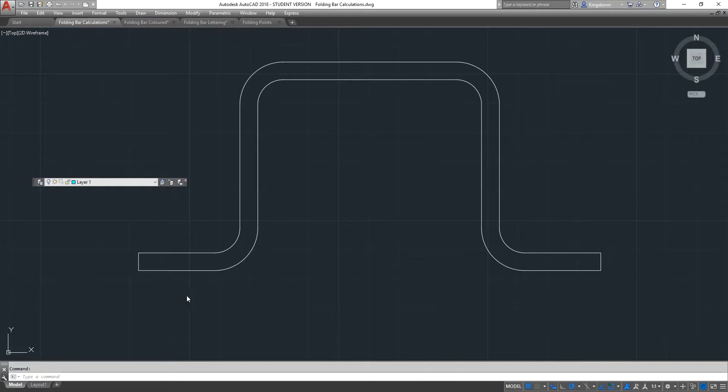So what we want to do is work out the exact cut length right around this bracket, calculate it out, and then work out what our fold points are. It's going to be folded in a press brake with a dogleg blade, though it could be done with a straight blade. So we'll turn some information on here.

Got some dimensions here. You can see from the overall top line right down to the bottom line, it's 71mm high overall. Let's turn those off. Internally, clearly it's 75mm.

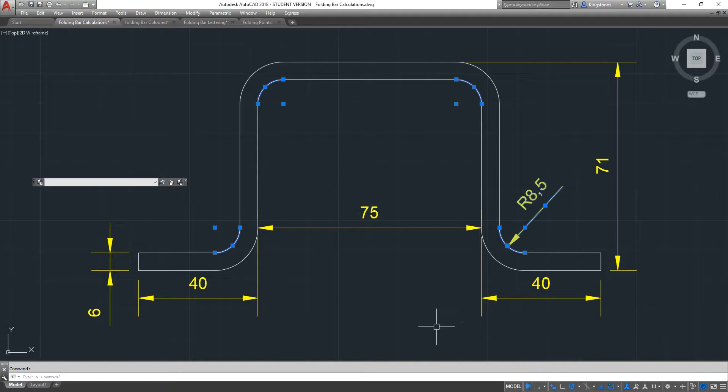From the very end to the inside, we've got a length on both sides of 40mm, so it's uniform. And you will see that in the corner it's got an internal radius of 8.5mm, which is the same for all of these corners here. Exactly the same. So there's the 6mm on the end for the thickness.

So we'll just bring it out a bit. So I've written up the top here, calculating the cut size and the folding positions on a flat bar.

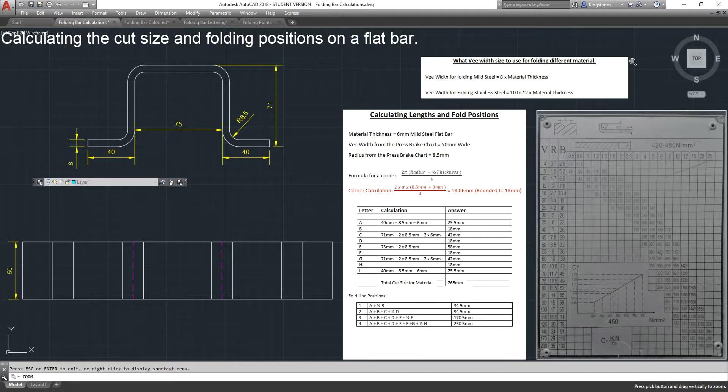So the very first thing we need to know is what V-width size to use for folding the different material. Well, it's going to be mild steel, so the V-width or the opening on top of the V-block for mild steel is always 8 times the material thickness. I'm using 6mm mild steel, so 8 times 6 is 48mm.

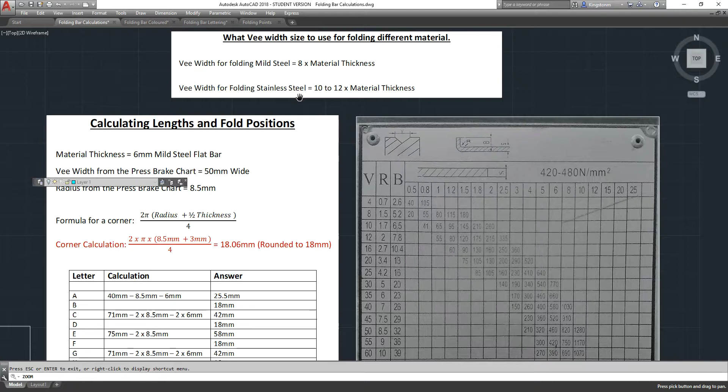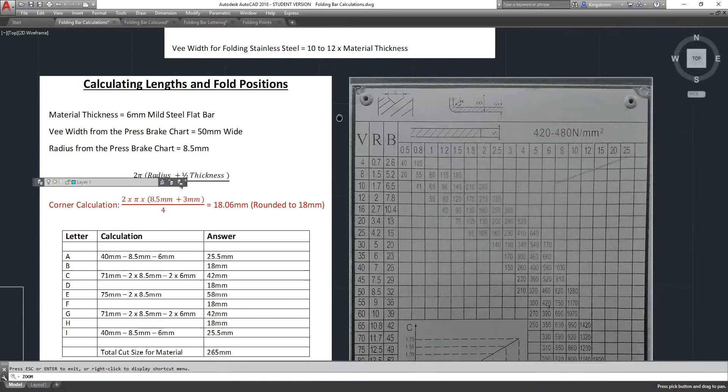Just for comparison, if it was stainless steel, the V width for folding stainless steel is 10 to 12 times the material thickness because of the higher tensile strength. So we want a V that is very close to

48mm. So we've got a press brake. Here's a chart on a press brake. Going across the chart, this line across here, here's 6mm. We could come down this line here.

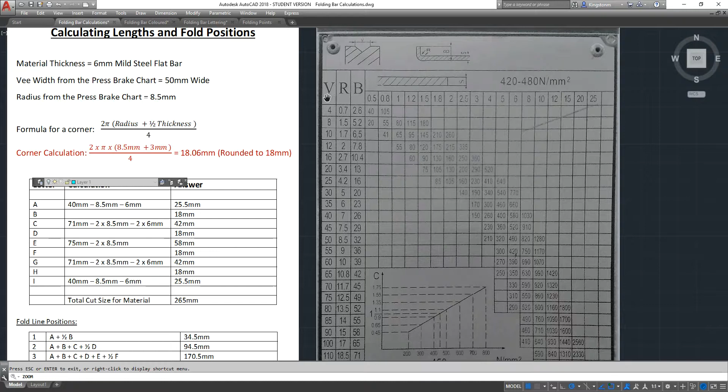The V on this side here, V for V, there's the opening on the top of the V. So that width for us needs to be 48mm. So coming down the chart, we've got a 40, we've got a 45, and we've got a 50. We're going to be using the 50mm V.

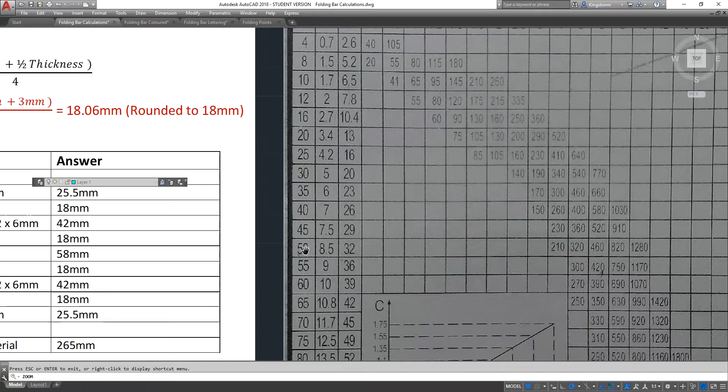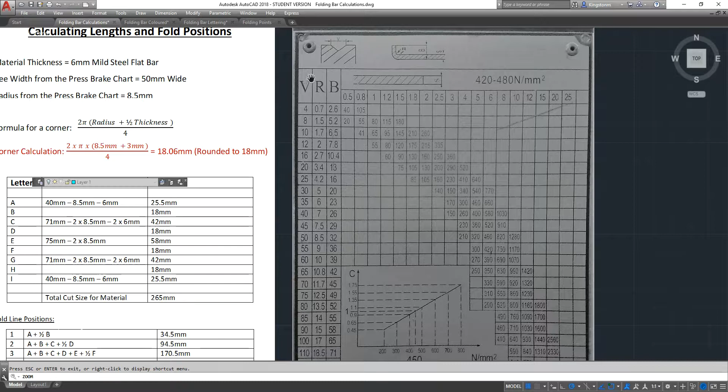And that tells us that our radius is the 8.5. So just this little drawing here, here's the 8.5 right into the internal corner of the fold. So that's the information we needed. Radius of 8.5 with a 50mm V. And that's why I have drawn it with an 8.5mm radius in that corner.

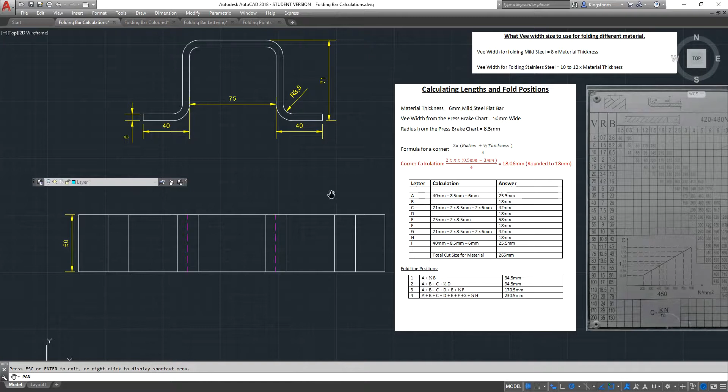So what we're going to do is we want to calculate this bracket out. So I've drawn up a chart here, calculating lengths and the fold positions. Material thickness is 6mm, V width, as I said, is 50mm, internal radius of 8.5.

So what we need to do is work out how to make a bracket like this, given this information. So one of the things you can do is take your bracket and break it down into its constituent components. It has a straight, then a bend, another straight, a bend, a straight, bend, straight, bend, straight. You can see I've individually labelled them. So that's how we're going to break it down.

What have we got on this drawing? Okay, here's all our information. So how do we break the first fold down to get this length A, which was that first coloured portion there? So it's 40mm overall from that outside line to the inside line.

That means 40mm would have to take off the material thickness, that's 6mm, and then we'd have to take off the radius. So we're taking off that line distance there, because the straight portion only goes from this blue line on the end here to this line here. That is the straight component right there. So it's 40 minus 6 millimeters minus 8.5 millimeters. So that's how we're going to work out our two straights on either side.

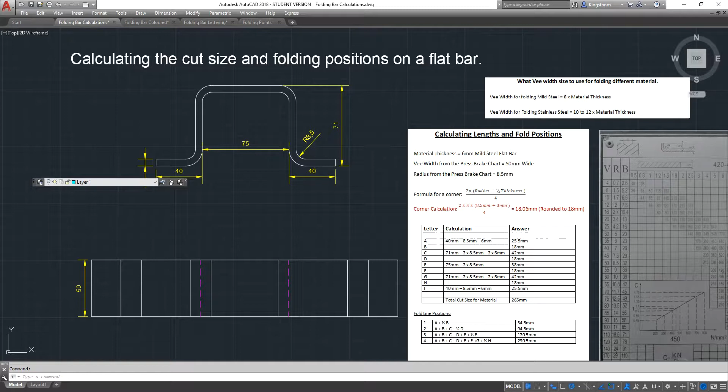So let's go back to our chart on our front sheet. We're going to get the right scale on this. Okay, so what I've done here, I've got my letter codes, A, B, C, D, E, F, G, H, I, down the left-hand side. I'll just drop in the pen so you can see the hand. A, B, C, D, E, F, G, H, I.

So the very first one, A, I said that was 40 millimeters. Let's go back into it. It's 40 millimeters long from there to there. And we had to take off the material thickness of 6 mils and the radius of 8.5. Drop back out of that, and that's what I've got. I've got 40 millimeters minus 8.5 minus 6 millimeters leaves 25.5.

So the A and the I, the two end pieces, if you come down the chart, you'll see that I is exactly the same, 25.5 millimeters, same as A.

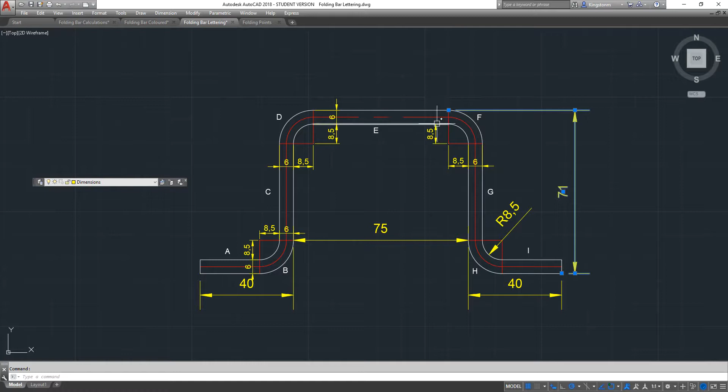C and G, they were the two lime green ones, and they were what I said, 71 minus 6 millimeters minus 8.5 minus 6 millimeters minus 8.5. So go back onto the front page. C, you can see what I've done. I've got 71 minus 2 times the radius minus 2 times the material thickness, leaves 42 millimeters.

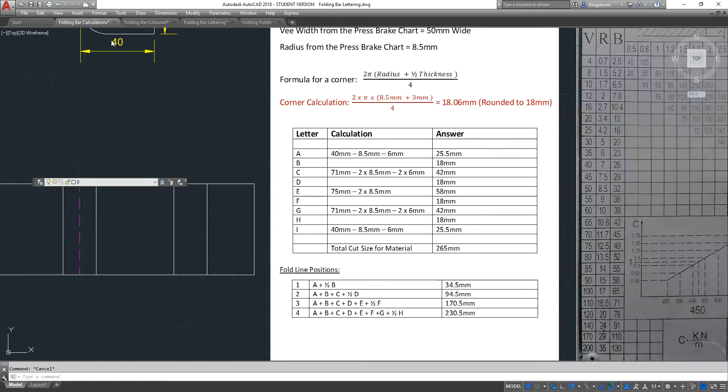So we've got C and G, which are at 42 millimeters. The only last straight line length is E, and that was 75 internal minus a radius and minus a radius. Go back to the front page. E, I've got 75 minus 2 times the radius, leaves us with 58 millimeters. So there's our straight line lengths, A, C, E, G, and I.

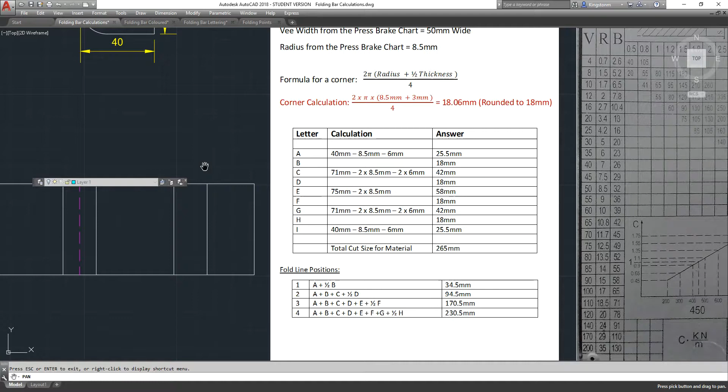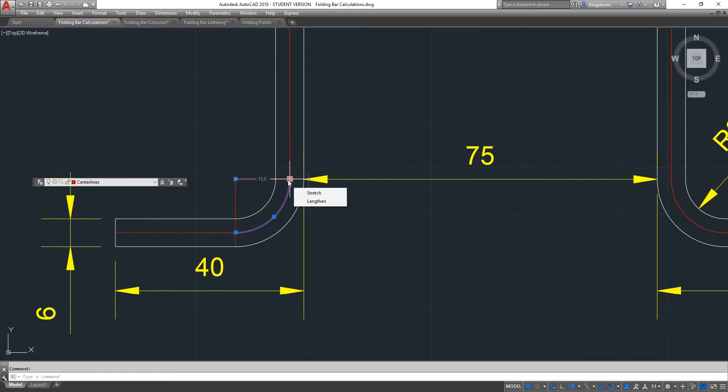The next thing we have to do is work out our corner radius, or our length, for the corner. Now I've got some more stuff to turn on here if I get my act together. When we work out our length around the corner, we're working out this mean line, not the throat line or the heel line, but this line here. So it's 8.5 millimeters plus half the material thickness, being 3, is 11.5 millimeters that you can see on the screen there.

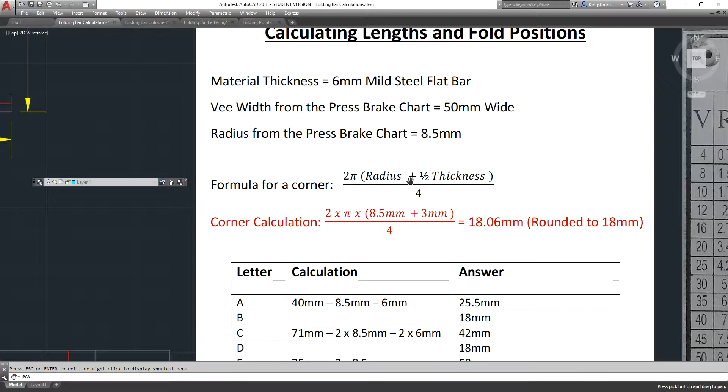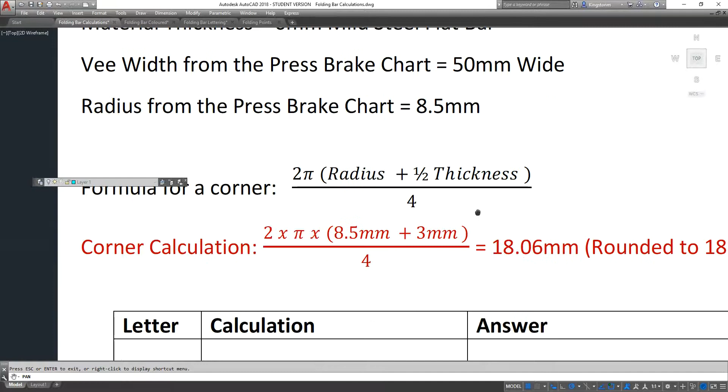So into the formula. The formula for a corner is 2 times pi times bracket radius, 8.5 millimeters plus half the thickness, i.e. 3 millimeters, all times together and divided by 4. Dividing by 4 means that 2 times pi times radius plus half thickness is for a 360-degree circle. Well, clearly a corner over here is 1/4 of a circle. So a circle being 360 divided by 4 is giving you a 90-degree corner. So on this calculation here, if we start to put our information in, corner, we've got 2 times pi times 8.5 plus 3.

Let's do that on the screen for you. So we've got 2 times, we got pi on here. I didn't even look for pi. So good at making a fool of myself. There's pi times bracket 8.5 plus half the material thickness, so 0.5 times 6 millimeters, close bracket, equals. So that's telling us that it's 72.25 millimeters for a 360-degree circle on that mean line.

So we have to divide it by 4 and we get 18.06 millimeters. That's what I've got there, 18.06. I've rounded it to 18 millimeters. You're not going to be working to 0.06. That's going to be an absolute impossibility when you're marking the piece of steel out with a scribe and a square. I could have rounded it to 18.1, but you're not even going to be able to work to that.

If you come down here, we've got 25.5. I mean, you can get pretty close to 25.5, so that's acceptable.

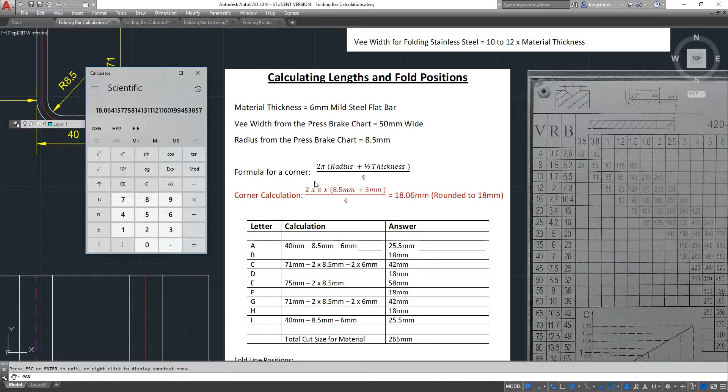So I've rounded this to 18. Let's just get rid of our calculator for a minute.

If you look at our corners, let's go back up into the coloured chart. B, D, F and H. Clearly 4 corners at 90 degrees actually add up to 360 degrees, so they make up one circle, but individually on the chart, B is 18, D is 18, F is 18, H is 18.

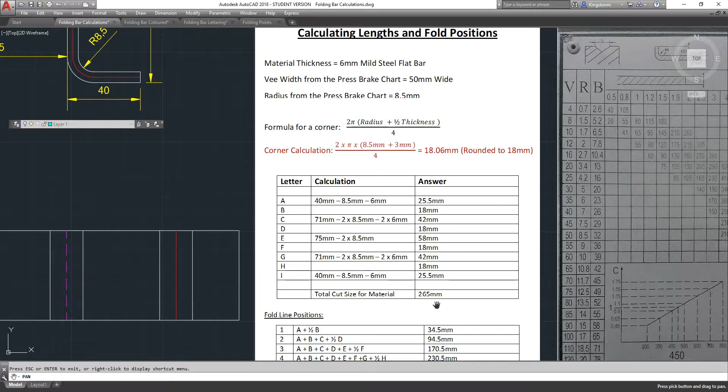If you add all those dimensions together, I'm not going to do it on the calculator, but you're going to get 265 millimeters. So that's the cut length of the bar that you're going to start with, using an 8.5 millimeter radius with a 50 millimeter V. So I've got this piece of steel here.

Well, it's a drawing, of course, but it's effectively a piece of steel. If I click on that and hit properties, you can see that it's sitting here at 265 millimeters long. There's the length, 265. So I've marked it out.

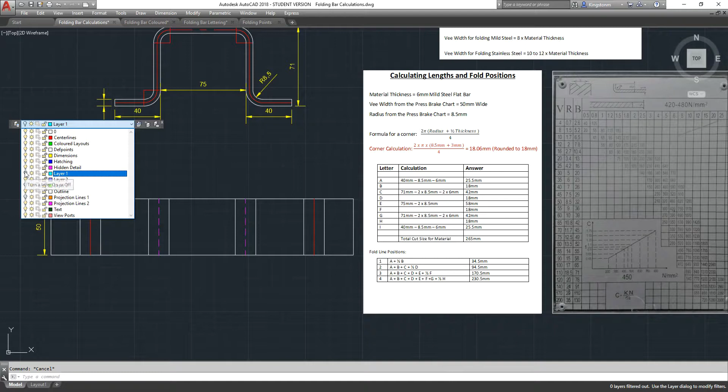So what I'm going to do is turn on some dimensions. Which ones have I got them on? I think they're on layer. So down here, our first dimension, can I get that on the screen all at once? I can, possibly. No, I can't. Yes, I can. You've got good eyes, you know you have.

Your first dimension, this length here is A, it's 25 millimeters. The next one is your B, it's 18 millimeters. So I've laid them out. This is A in this box here. Go into pan. This box is A, this split box here is B, this one is C, this is D, E, F, G, H, and I. You add all those dimensions, they're exactly the same as what's in the chart there.

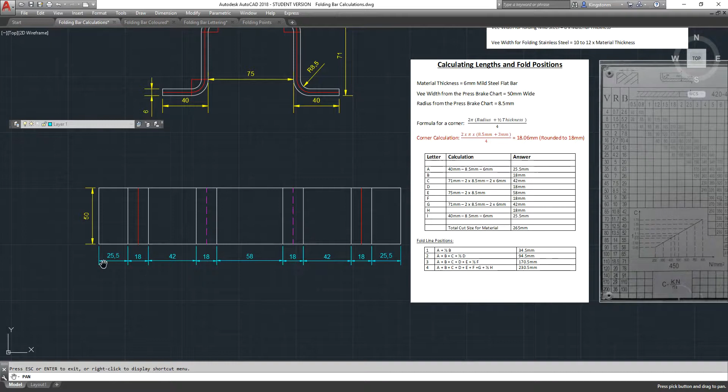So that's how you work out a cut length for a piece of bar.

So you've marked your lines on the bar, now you've got to do your folding, and you've got to work out where your fold positions are.

The computer's frozen for a moment. Now we're away again. Go back to the start.

So these lines I've got here, the two red ones and the two - come on, it's just freezing a wee bit - the other two lines are exactly in the position of half of that 18mm line there on each one.

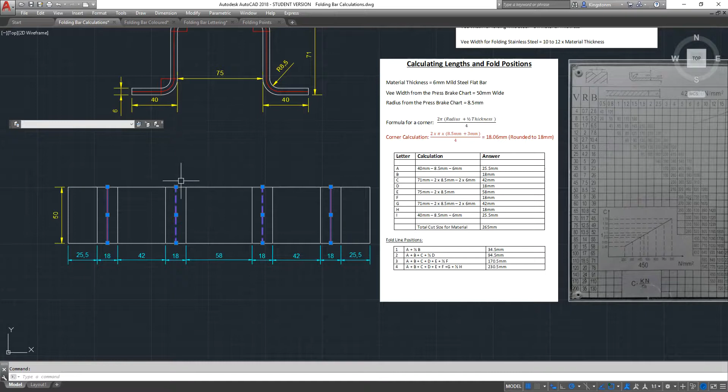So in the chart, I put the fold positions for you for this particular bracket. So number one, I'm going to get that on the screen. I've moved it when I shouldn't have. So number one is the length A and half of B.

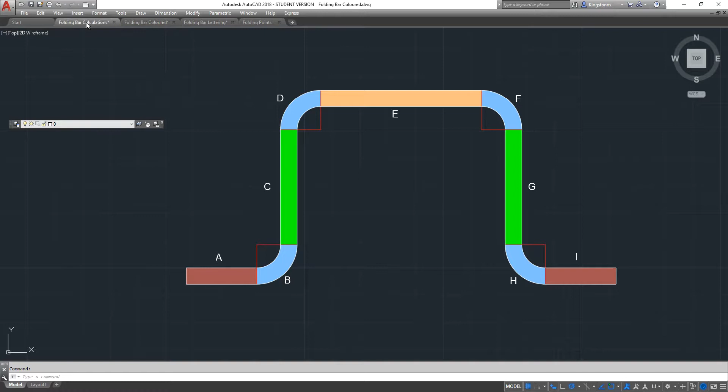So let's go back to the coloured one. The length of A was 25.5. The length of B around the corner is 18mm. So half of 18mm is 9mm and 25.5. So you can see here I've got A plus half B: 9mm and 25.5mm is 34.5mm.

So that's what this first line here is going to be from one end. If you actually marked your bar out from both ends, it would be the same distance in from this end as well, but I've actually gone and marked it all from one end.

So I'm going to turn some more information here on. What have I got it on? I think I've got it on layers. There we go. Coming in from the end of the bracket, my first fold is 34.5mm. My next fold...

For number two, fold line number two, if I go back into that last one, so we're working on fold line number two now. So we've got the straight length, we've got a full bend, we've got the straight length, and we've got half the bend. So we've got all of A, all of B, all of C, and half of D.

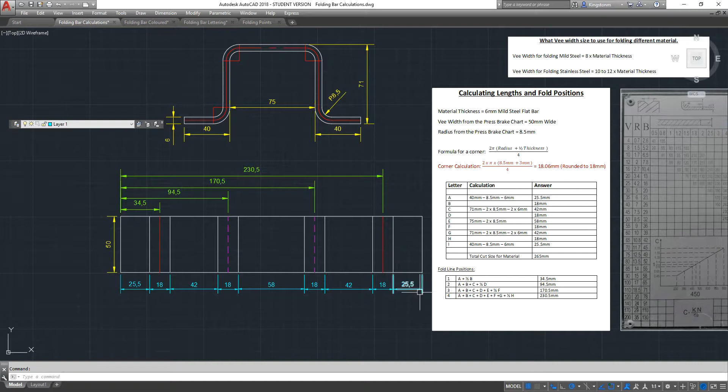Back into the front. So what have I written here? Number two. I've written A plus B plus C plus half of D is 94.5. So if you add those up, I'm not going to do it on the calculator, you can try it if you want. So coming in from that end, that line from the end to this magenta line here is 94.5mm.

Once again, because the bracket is symmetrical, you could actually work from that end as well and mark it off there. And in actual fact, if you did that, you'd have your bracket marked out.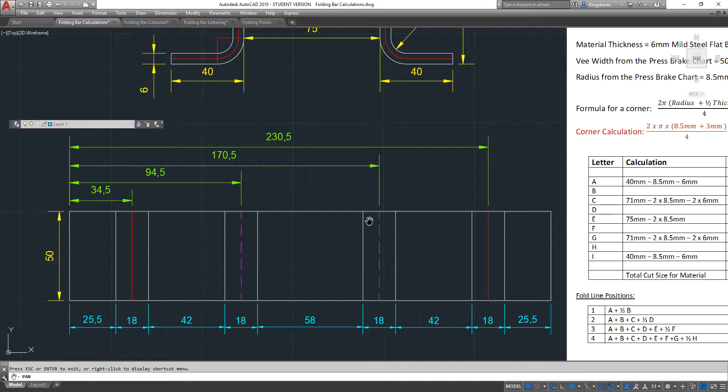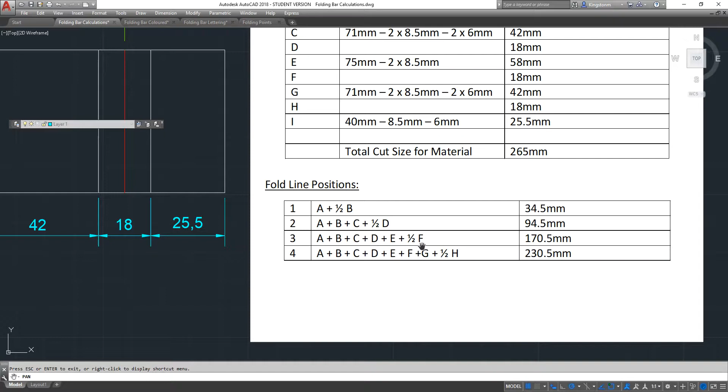But I've worked all from one end. So this next line to this point here, we would have all of A, all of B, all of C, all of D, all of E, and half of F. So if I go into 3, what did I say? All of A, B, C, D, E, and half of F. Add them up the top there, and you get 170.5mm, and that's what I've marked in from the end there.

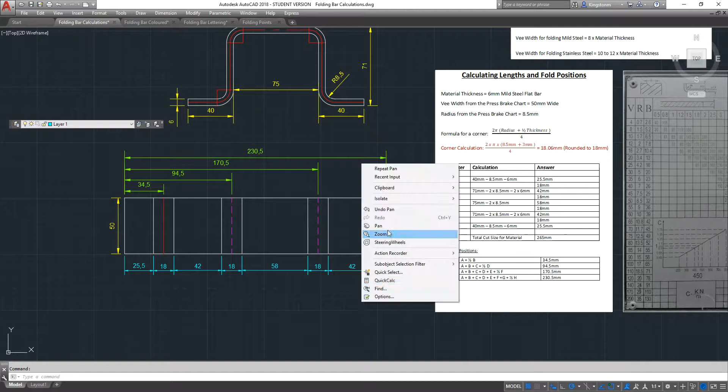Clearly the last one, do I need to go? I will, just for sake of clarity. All of A, all of B, all of C, all of D, all of E, all of F, all of G, and half of H for the fold line number 4. Back into the front. So number 4 is all of A, B, C, D, E, F, G plus half of H is 230.5mm. That's what I've got there right from the very end to that fold line.

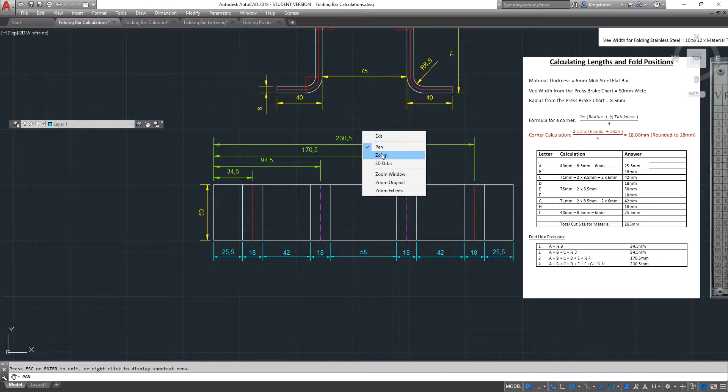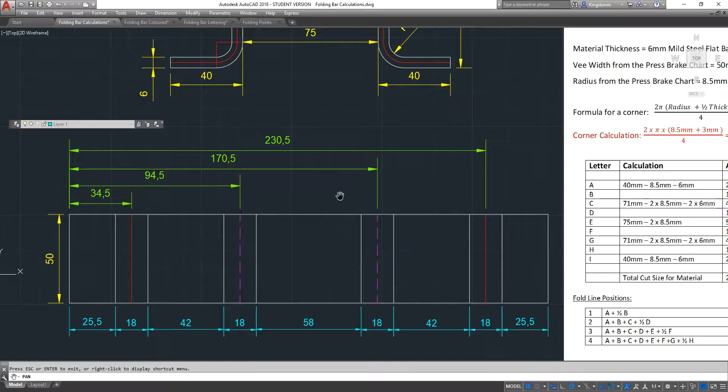So there you go, that's actually already showed you how to mark it out. What I do want to say is if you look at the bracket, this fold here is on the outside and this fold here is on the outside, whereas these two are on the inside. So I have marked the two red lines as the outside and the two magenta lines as hidden detail. They're on the other side of the bracket, so they are marked on the other side.

I'm not sure how many of you have actually folded things up like this, but for your folding, generally what you have to do when you're using a dogleg blade or a standard V block is you need to do fold number 1, fold number 2, go to the outside and do number 4, and come back and finish off on number 3, because the blade needs to get through here on this sort of angle or 45-degree angle to actually do your folding. So it would be 1, 2, 4, and 3 would be your sequence for your folding.

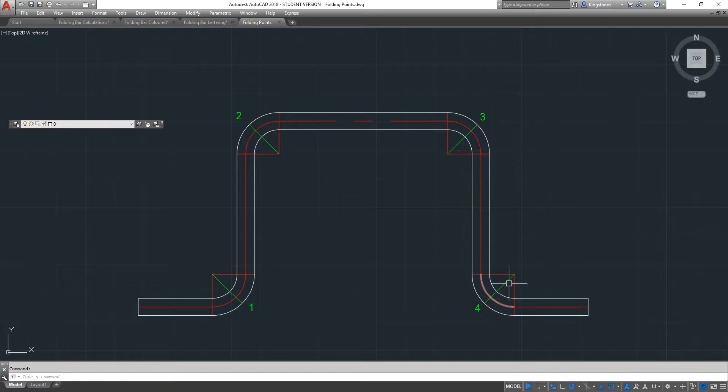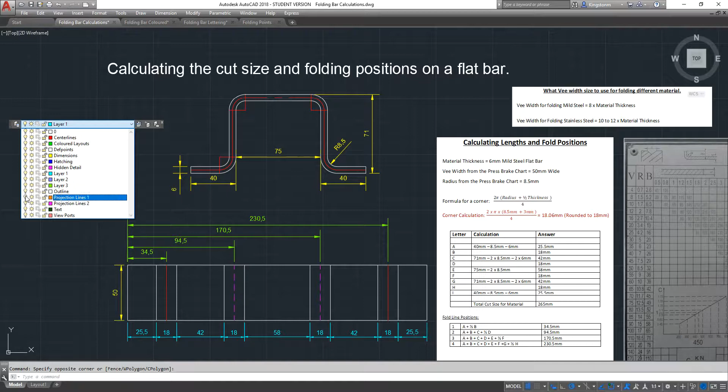So going back onto the front page, what else did I need to turn on? I've got one other thing, projection lines. If I turn that on - computer's playing up. There we go. So I've actually gone and put my lettering in there for you, just to finish it. There's your A, B, C, D, E, F, G, H, I.

All the information there for doing a saddle bracket. I will be putting other brackets up for you to see how they're done. Let's get rid of that, get rid of that, and get rid of that. So I think that's all I need to give you. There's a chart there, I think I've shown you how to go through the chart and do the calculation.

This data here, well, there's your standard information. That's sort of, you know, when you're doing your folding in future, that's the rule of thumb you'll use. If you're folding mild steel, obviously galvanized Zintec, just standard mild steel, you would have 8 times the thickness of the material, and that will dictate what size V you're going to use on the V block, which will give you your radius. Dump your radius into the calculation there and half your thickness, and you can work out your corners quite easily.

Seems like a lot of information there, but it's quite straightforward. You're really only doing addition, subtraction, multiplication, and division. Like all these things, they take a bit of time to get used to. You will make some mistakes at the start, but don't stress about it. Everyone's done that when they've started out in life. And good tradesmen still make mistakes today.

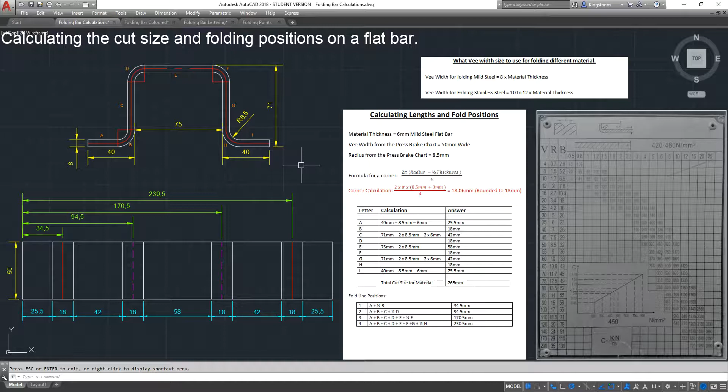Keep coming back to the video. I will stick other videos up with different profile brackets explaining exactly the same sort of processes to go through, and hopefully you can start to learn, gain some confidence, and strike out boldly yourself. Leave it there. Thank you.